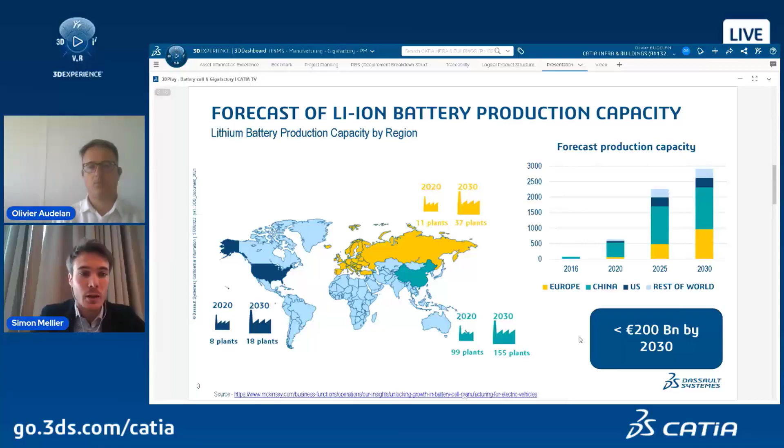And as you may know, the construction of the gigafactory is quite complex, requiring the integration of numerous capital expenditures, such as the buildings, the infrastructure, the energy, and the different production equipment that will be required, as well as the specific areas and specific atmosphere for testing, but as well for production, like dry room, clean room, and others. So can you move to the next slide, please, Olivier?

So how can we support the battery cell manufacturer? Actually, we have created a solution offer based on three main pillars and supported by the 3D Experience platform. The first pillar on the left side of this slide is about battery cell development from material to system. Then you have the battery manufacturing, operation, engineering, and execution in the middle. And on the right, highlighted in yellow here, there is the battery factory infrastructure for engineering and commissioning of the

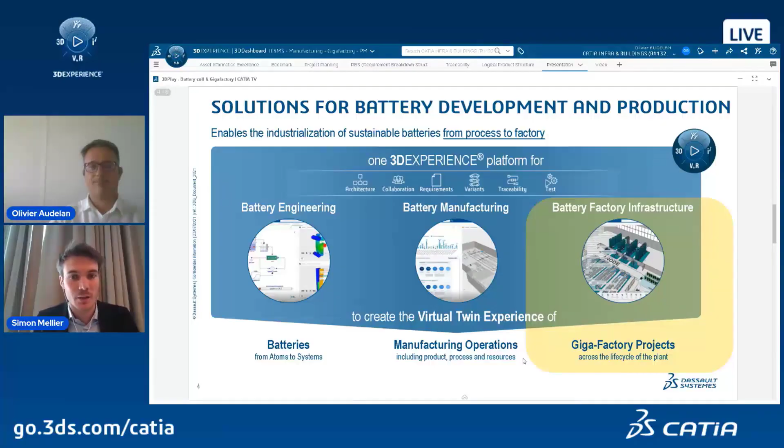factory and gigafactory. So the goal is really to connect the product to the process and the process to the gigafactory and create an end-to-end virtual twin experience to enable the most efficient industrialization and the delivery of the most sustainable battery cells. So today, we propose to focus on the highlighted pillar here in yellow about the battery factory infrastructure. Next slide, please, Olivier.

So, thank you. So considering the market demand and the incomparable factory construction plan, it's very critical to improve the industrialization and the ramp-up time of production facilities, whether the pilot lines, but as well the gigafactory for production at large scale.

This type of project is a collaborative process between the factory operator, the contractor, the line builder, the equipment makers, and it covers several steps from the user requirements, the conceptual engineering, going through the basic, then the detailed engineering and construction, followed by the commissioning, the qualification, and it can take 2, 3, or 4 years until the industrialization of the gigafactory itself.

So usually, what we have seen so far, there is a lack of continuity in the exchange between all the stakeholders that I mentioned before, so between the factory operator and its service suppliers. And this lack of continuity results in a lack of control of the relationship and time lost, especially during the engineering phase, with many sequential steps, errors being discovered too late sometimes, but as well during the qualification and the validation of the production and the production line.

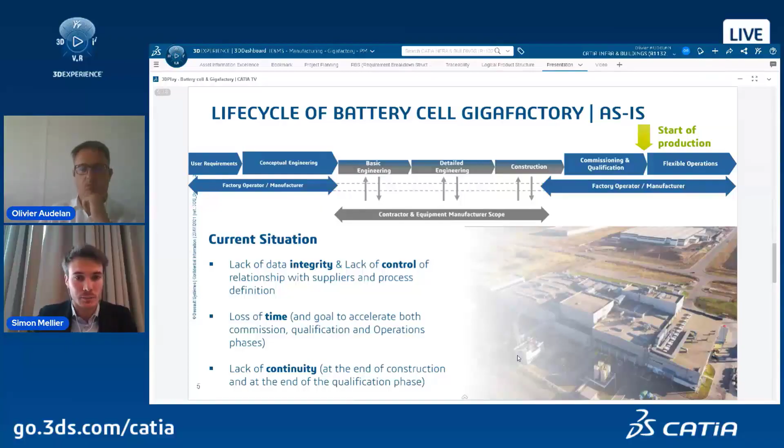Next slide, please, Olivier. So with the 3D Experience platform, we propose to our customers to create the virtual twin of their production facility at the scale needed to meet their challenge. So it can be from the equipment to the line, to the plant, to the manufacturing network. And it allows keeping control of the relationship with the service supplier, doing agile loops to design an optimized manufacturing line. Because you can share data, you can run simulation, you can proceed to the virtual qualification of the line. And all of that will dramatically reduce the time lost and the cost of the industrialization of the line.

But not only, we can use the virtual twin to build and simulate a new line, but it could be used as well during the operation phases. So you can optimize and predict your operation, comparing the real world data from the plant and the data that have been simulated using the virtual twin of the line.

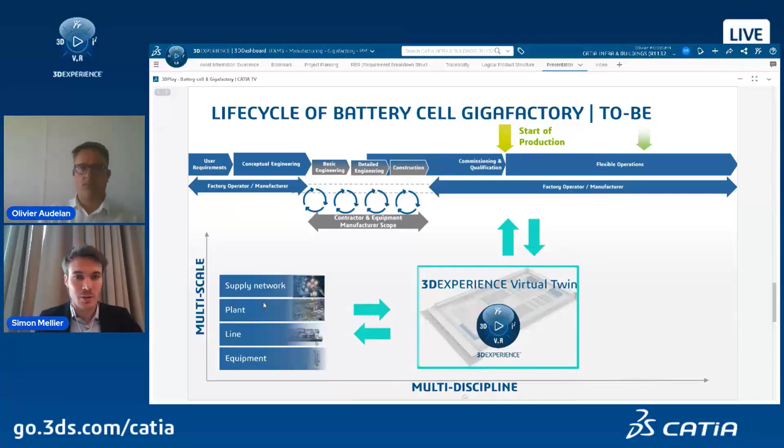So we can connect the people with information and the data, and that will enable quicker, more informed decisions while introducing virtualization and simulation into the manufacturing planning and operations and the industrialization of the line. And all of that will help to ensure the gigafactories are produced as designed in the most cost-effective and high-quality manner. Next slide, please, Olivier. So how can we do that?

So we have created a dedicated solution, the battery factory infrastructure, and it enables the development of all the functional systems in your gigafactory. It will define, simulate, validate the behavior of the complex system and ensure the engineering integrity from the requirements through the system engineering, the model-based design approach, around one collaborative single source of information.

So it allows the synchronization of all engineering processes around one collaborative single source of information to get the right design decisions for your factory, for example by creating the layout of the factory fully compliant with the industry standard and the building information model, the BIM. But enough talk. I will give you the floor, Olivier, to show us in real life what it looks like.

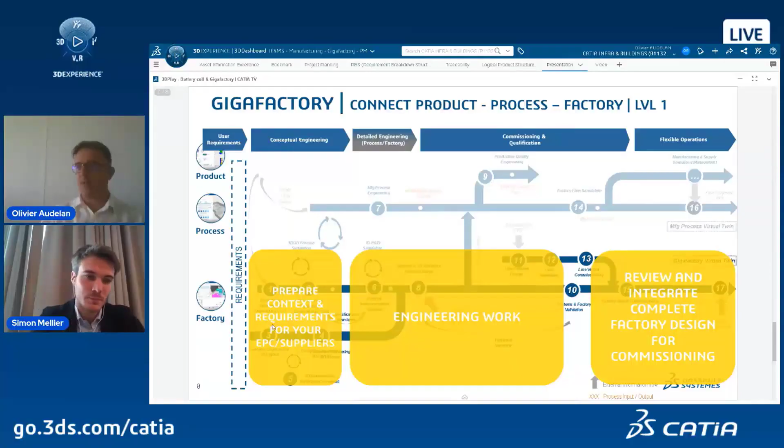Thank you, Simon. Thanks a lot. So thank you for all those inputs. So let's have a look now at how CATIA could help to enhance the way we are defining the gigafactories right now.

What is really important, we are considering, in fact, a Gigafactory as a system of systems, and so this is why we really want to embrace a systems engineering approach. And to do so, we fully rely on our CATIA data model in order to be, first of all, able to manage the requirements, because everything starts with requirements.

And so what is really important is to be able to capture and collect any kind of requirements. Whatever those requirements are, coming from the industry, from the regulations, from standards, norms, in order to drive afterward your design. But not only, the purpose is not only to drive the design, it's really to anticipate potential issues or constraints coming from operations.

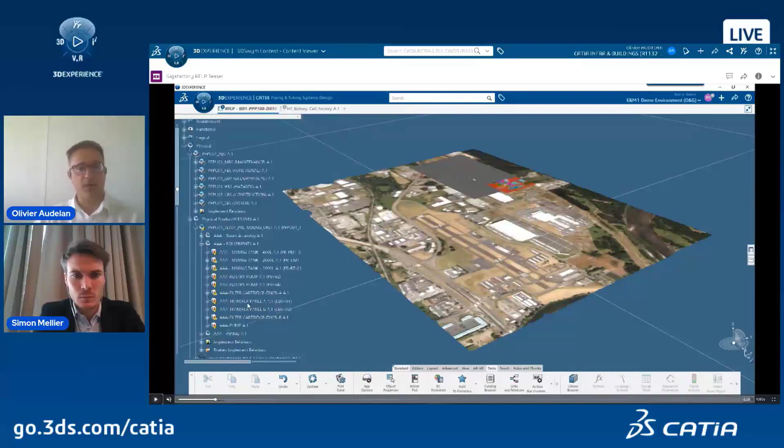the right way, meaning being able to identify the right sustainability impact, the right cost analysis, and the right technology efficiency in order to choose the right solutions and to prepare the right specifications for my supplier afterwards, up to them to manage the detailed design and then the construction of my Gigafactory. But at least as an owner and operator, I will have this capability to have this defined.

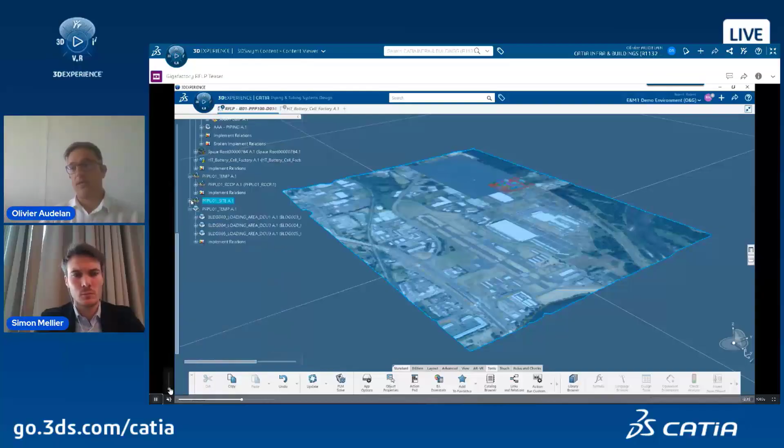And the purpose for us is really, as you can see, to integrate the Gigafactory in its environment. Because as the Gigafactory is a system of systems, we need to be able to interact with the external environment, whether those are natural resources, existing infrastructures, linear infrastructure, civil infrastructure, but as well industrial infrastructures. If you potentially need to bring hydrogen into the Gigafactory. So to really understand all those potential impacts and to take once again the right decisions. So this is why you will have different capabilities, different layers in your Gigafactory.

A volumic decomposition, as you can see, with all those volumes in order to manage all that is related to spaces, to your functional architecture. So this is really based on your requirements, your capability, especially for an owner and operator, to define all your functions, mission, services for your Gigafactories, okay? And based on that, you will have capabilities to decompose the layout of your Gigafactory by volumes, unit, subunit, until the rooms and potentially until the main equipment's positioning.

But it's not only, as I told you, and as you can see on that part, to take into account engineering topics. You can see that we have construction, we have as well hazards. So all of that information can be taken into account as soon as possible, because it's really key to identify the capability for your mobile equipment to navigate from a building to another one, from a unit to another, in order for them to bring the right resources to the equipment, or to move an equipment from a unit to another one.

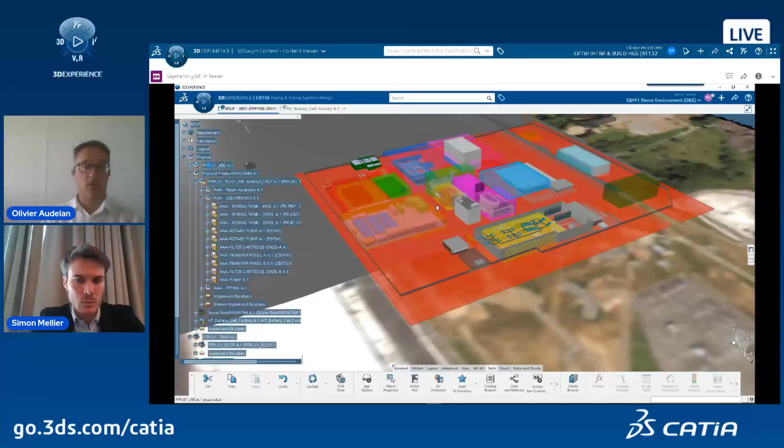And those inputs have to be taken into account as early as possible, because if you think about that during the construction phase, it will be too late. And so potential impacts of modification will be huge. So this is why having this definition of your Gigafactory as soon as possible is definitely key for an owner operator to anticipate as much as possible those potential impacts.

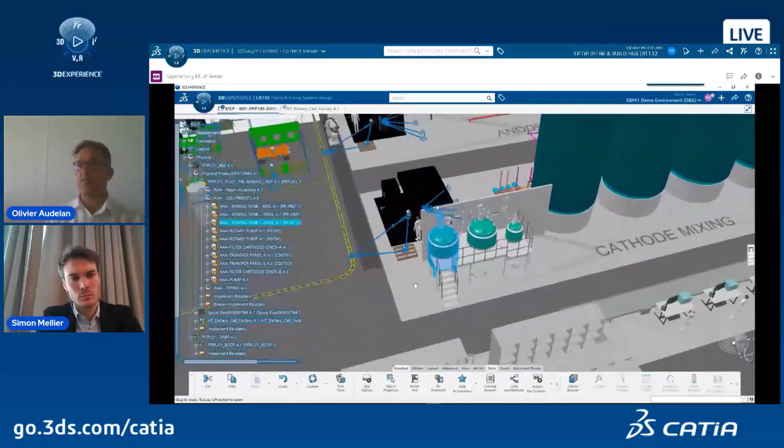Then we will have the capability to go to the detailed design of the factory, of the process lines themselves. So being able, based on the process flow diagram, based on all your systems definition, to manage the detailed design of your different process lines, and to manage as well the definition of the equipment themselves. Again, what is key is everything is based on the requirements.

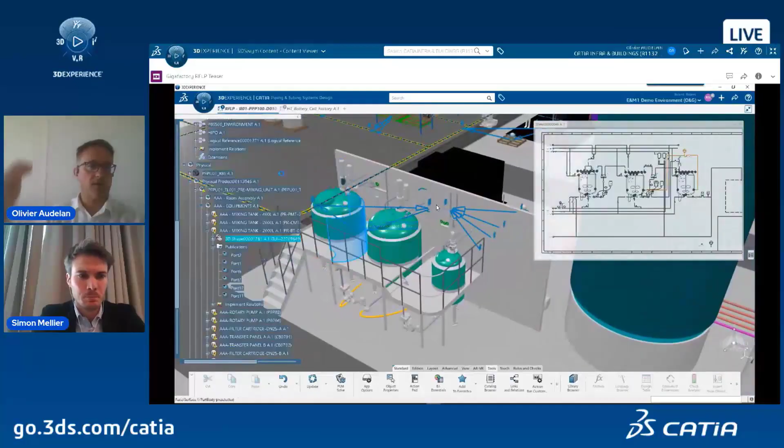So it's really a requirements-driven approach. And like this, you ensure an entire traceability all along the life cycle of the Gigafactory. Whatever the layer you are dealing with, on the site, on the factory, on the equipment, no problem. This is really an entire traceability.

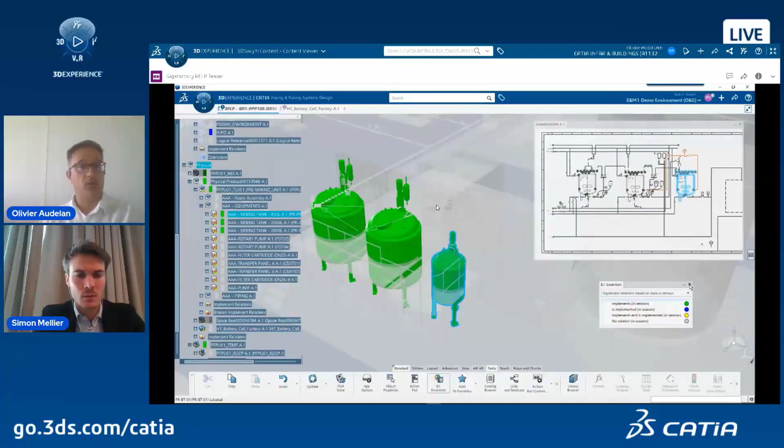And what is key is that your systems will be fully defined from 1D to 2D until their 3D definition, and then up to them to be consumed afterwards by our DELMIA solutions, in order for them to manage the process planning, to manage all the training for the operators, and so on and so forth, to optimize as well the factory flow by itself.

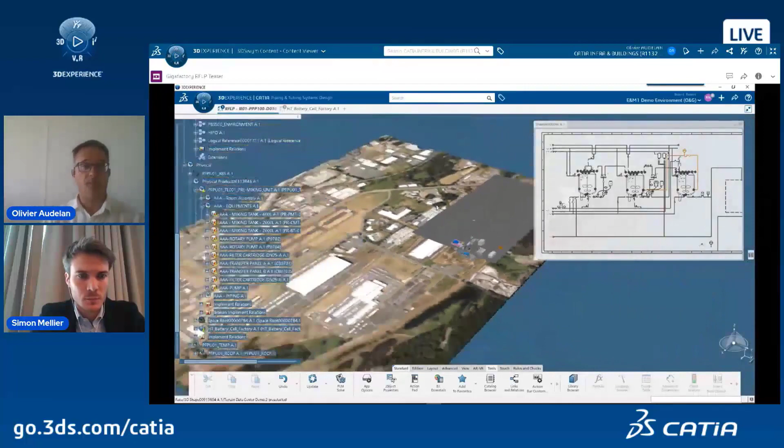So this is really, as explained by Simon, capability afterwards based on a single source of truth, to have all stakeholders working all together on the same data, on the same define and design of a gigafactory, in order for them to be as efficient as possible during operation phase.

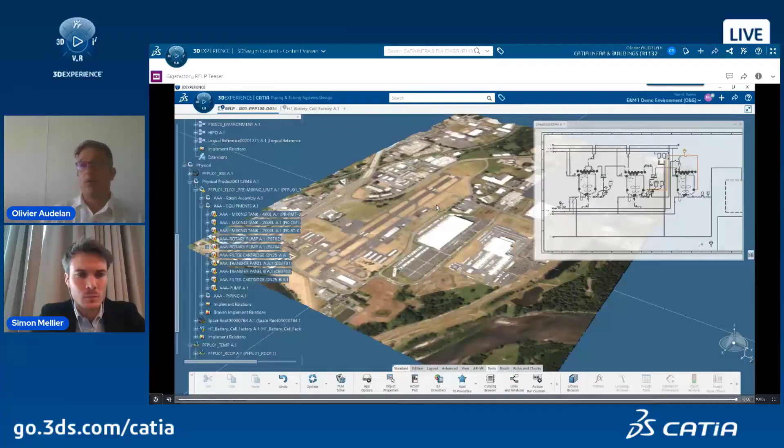So this first part was really to present you how CATIA can help based on the RFLP data model, so requirement, functional, logical, physical data model, to define and potentially to design, if you're an EPC, a gigafactory. But let's assume that now I'm not anymore an engineer.

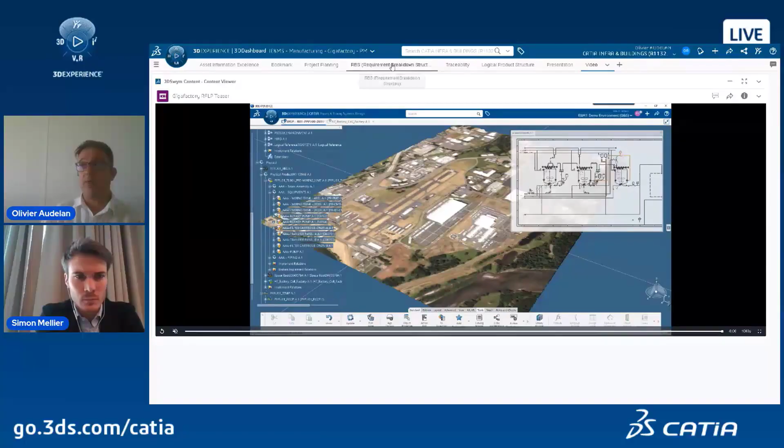Let's say I'm more project manager oriented, and so my purpose is to be sure that at any stage of my gigafactory life cycle, I will have access to the right information. And this is where the platform is really important by providing a single source of truth, a real collaborative way of working. Because as you can see now, I'm on the dashboard, and I will be able to have access to any kind of information.

Once again, the purpose is for you to be able to have access to the right information at any time and to be able to analyze, to manage the traceability, to manage the impact of change. And we will see just after why we think the platform is definitely fulfilling all those inputs. But now let's have a look at my dashboard. As you can see, on a single view, I will have access to any kind of information.

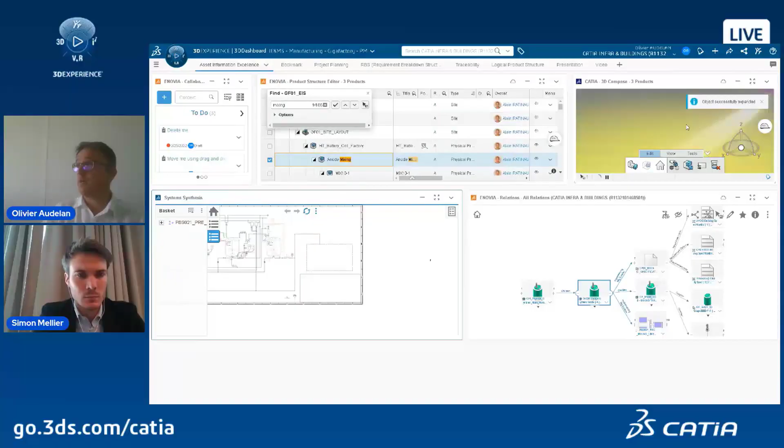And what is really interesting is if I want to visualize them in 3D, I just have to do a focus on, and then you can see that I have directly the data loaded in session. So for sure, I have a huge amount of data in that case, but you can see that directly I can zoom in on my data. But let's hide some data in order to have a better view. I will just show you that directly on the 3D play.

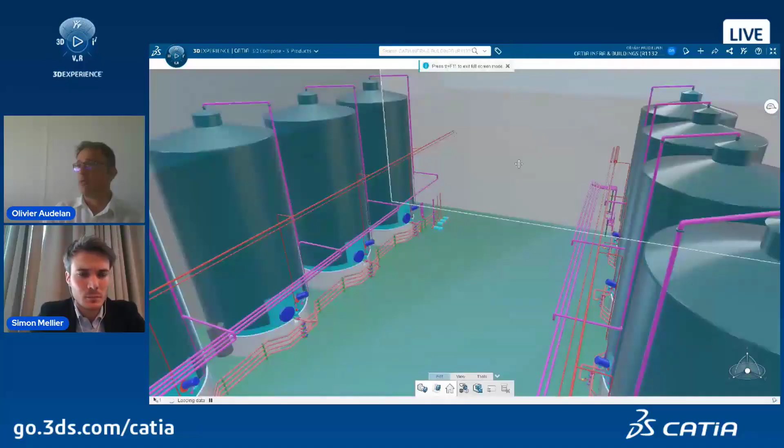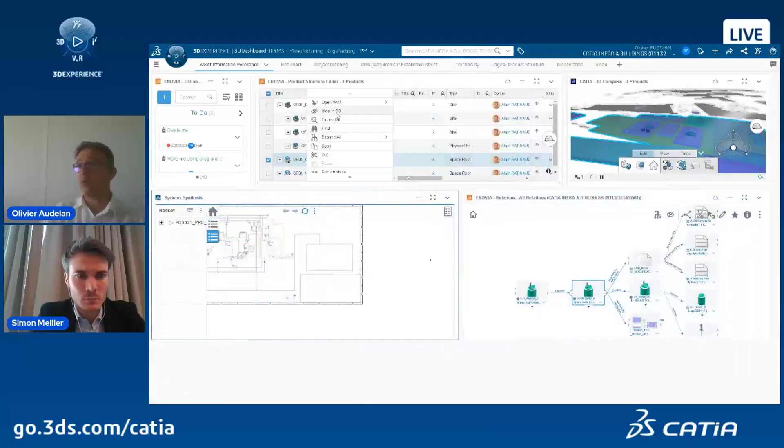So if I just zoom out, I can have access to the same information as I was showing previously on my CATIA environment, on my authoring environment. You see, definitely having the capability to visualize all those information, and for sure to search for information, but as well, if I want to hide some information, I have this capability, and then directly I can see my gigafactory as it has been designed, and this is where I will find all my process lines and all my equipment directly on my gigafactory.

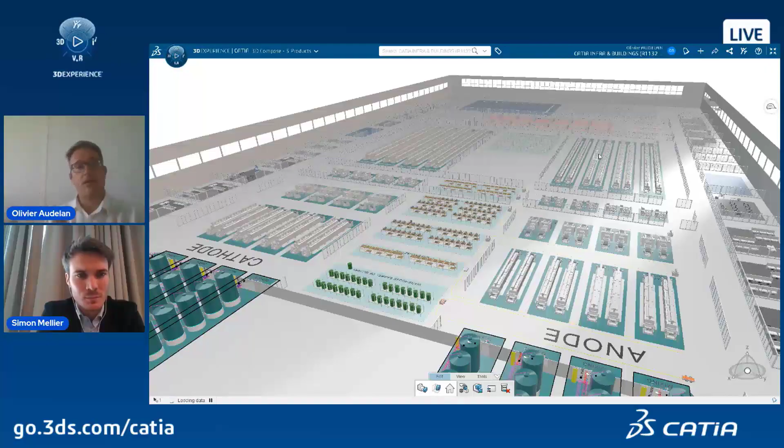So really capability for you to manage a huge amount of data, because this gigafactory has been integrated in its environment. In this case it's a cluster in the south of France, representing an area of about 100 kilometers by 30 kilometers. So a huge amount of data that you can aggregate on a single environment, and as you can see, you can navigate inside. But what is important as well, if you remember, I was searching for my mixing tank.

What is important is that by searching on my product breakdown structure, I will have access to all the information related to that mixing tank, meaning I have a 360 view of my mixing tank: all requirements, all functions it's belonging to, on which schema its behavior is defined, on which area it has been used, and which documents it relies on in terms of standards, specifications, regulations, etc.

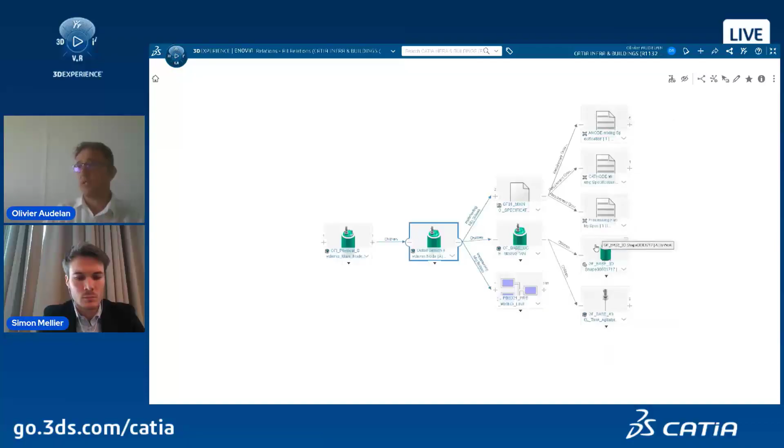So you see, I have my mixing tank. I can see that that mixing tank is used on that piping and instrumentation diagram. You can see that this mixing tank is fulfilling those requirements and has this 3D representation. So capability for you to have access to any kind of information.

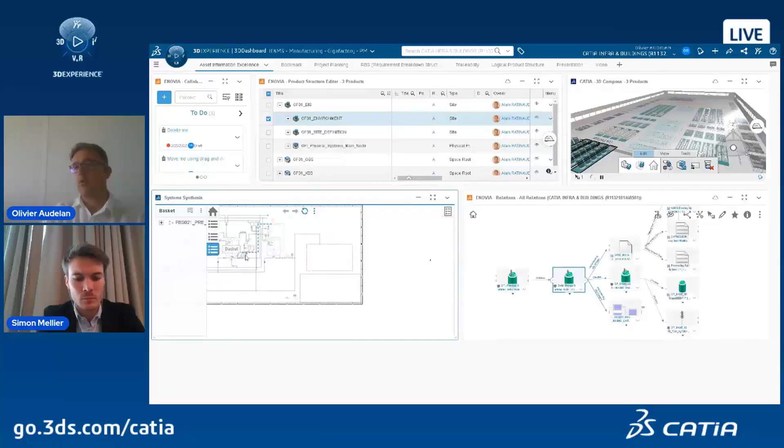But what is really important is not only to have access and to be able to visualize the information, because if you want to visualize the information, it's just a matter of drag and dropping this to this new tab. And like this, you can visualize your schema, you can visualize your requirements. So in that case, I already loaded the data.

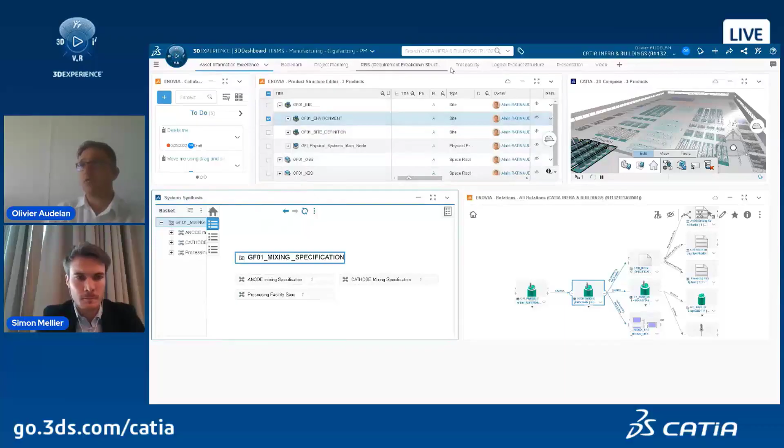So you see that I have a P&ID that has already been loaded. I could visualize requirements as well, and any kind of information needed for me to analyze the data I'm working on, and specifications, for example. But what is also important is to be able to manage the traceability.

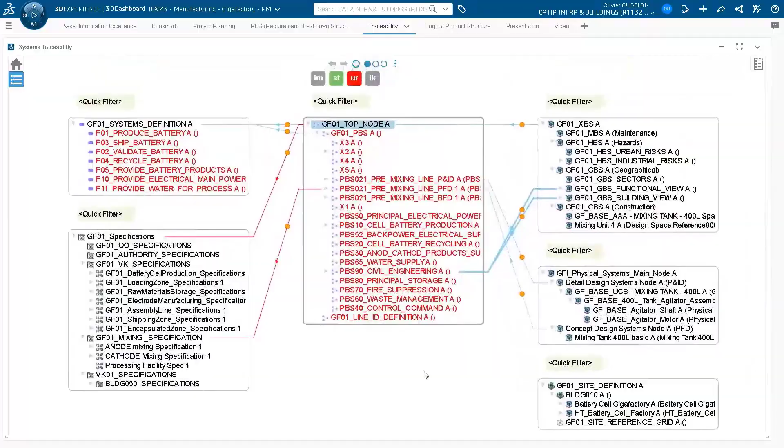So yes, as I told you, traceability is key. The purpose is to be able to identify any impact related to a change. As you can see on this widget, we have the different views of our asset, of our Gigafactory, meaning its functional architecture, all the requirements related to this Gigafactory, but as well all the schematics, so all the systems decomposition, the geographical decomposition, plus the product breakdown structure, meaning the detailed design of the Gigafactory.

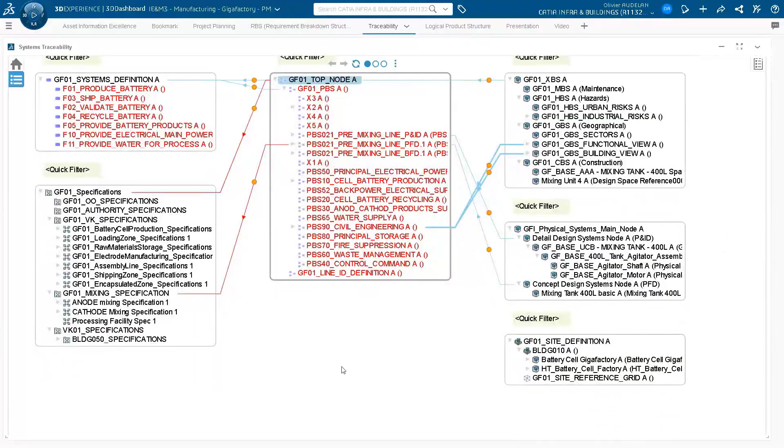So what is really key is that if you have to change a requirement, due to a supplier or due to an internal department asking you to perform this modification, quickly, by just clicking on that mixing specification, you can see all the impacts related to that modification.

So it means that for any kind of information, you could quickly have a holistic view of all the potential impacts in order for you then to involve the right actors to analyze or deep dive on the analysis of the change, and then to be able to take the decision.

Another topic, because we talk a lot about sustainability: what is really important is how to manage the sustainability aspect on the definition, not only on the design, but directly when we are doing the definition of our Gigafactory. When are we able to manage such environmental feasibility?

This is something that we can manage as early as possible, meaning that when you are defining your Gigafactory, you will think about technical feasibility, economic feasibility, but now we will focus on environmental feasibility.

We have definitely the capability to enrich the Gigafactory virtual twin by aggregating, by adding information related to sustainability. And this is really important, because like this, for you to take decisions, you will have access to all the information: economical, environmental, and technological. Really important for you to manage different trade-offs and to take the right decisions.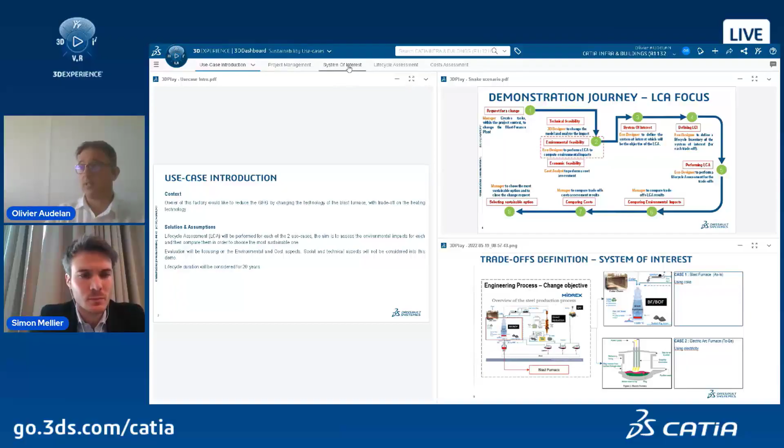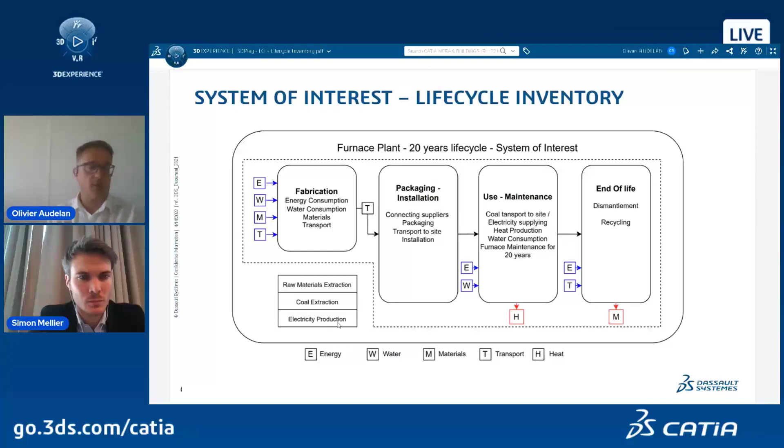So to do so, we define our system of interest, meaning being able to define for each phase of the factory—fabrication, packaging, use, maintenance, and end of life—what are the key topics, what are our interests on each topic, and what are the inputs and outputs for each step. You can see that for a Gigafactory, typically the raw materials extraction, the coal extraction, and the electricity production are not the responsibility of the owner and operator, so those topics won't be taken into account during our analysis.

As soon as we have this system of interest, and again we are managing all of that thanks to requirements—keep in mind, traceability, all along the life cycle of your Gigafactory—we will have the capability to analyze directly.

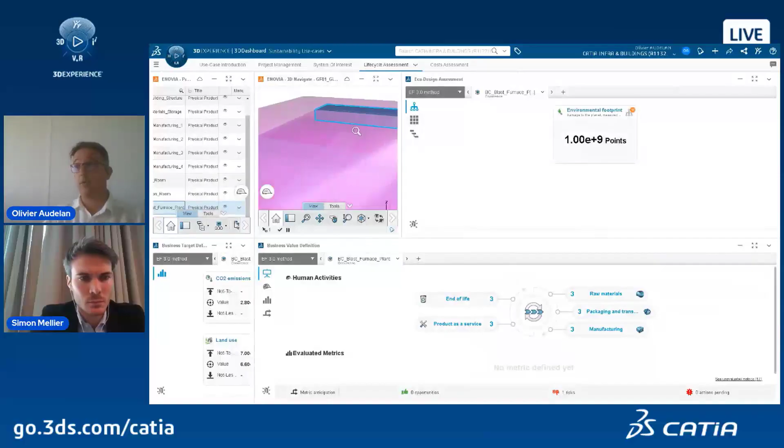And even if you have a look, I don't have the detailed design of my Gigafactory yet, I just have a basic representation of my Gigafactory. But in fact, based on our capability to define what our main system of interest is and what main KPIs we would like to track—in that case, CO2 emissions, land use, and water use.

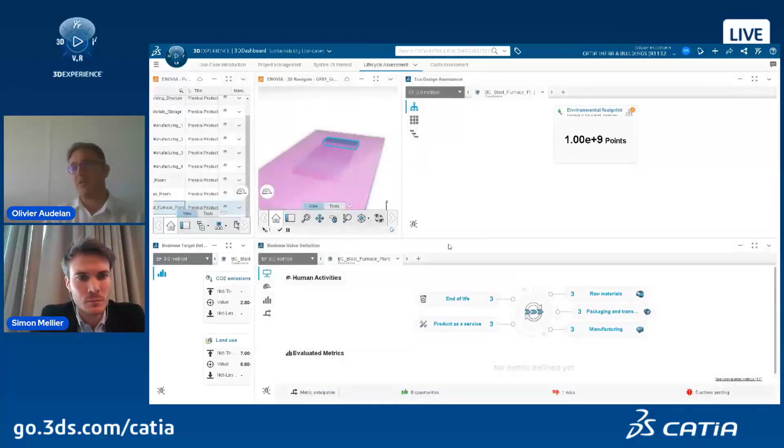We did it on a simple way, just for a demonstration. We will have the capability, thanks to our connection with the EcoInvent database, to collect all these KPIs and to manage this life cycle of interest, and then to define our life cycle assessment.

Based on the definition of our factory, and based on the limits we define for each KPI or the target we would like to achieve, you can see the result at the end. In terms of CO2 emissions, we are within boundaries, but we are out of boundaries for land use and for water use.

So this gives you, really early on in the process, the capability to think not only about cost and technological efficiency, but as well environmental impact, and to take the right decision to define the right systems for your suppliers, up to them to define them in the right way.

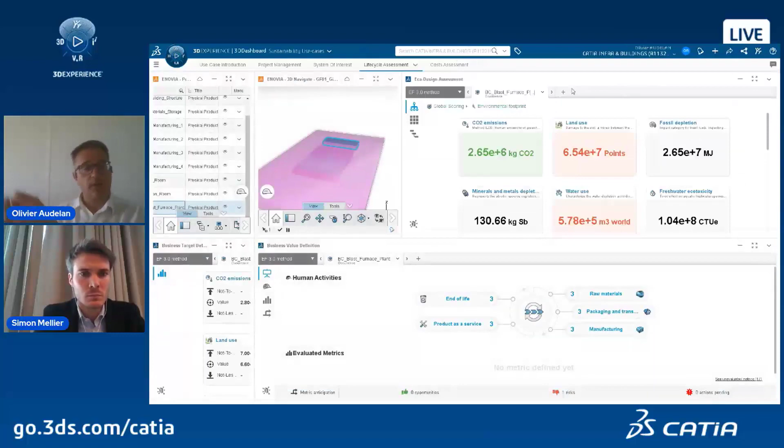So just for you to know, this was a quick introduction to the sustainability topic. We will deep dive into it in September for a new CATIA TV episode led by Yarob Odi. Stay tuned in September for that topic.

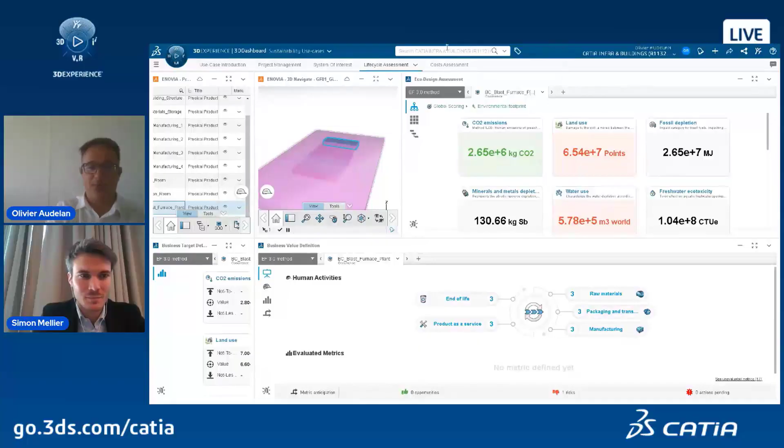But let's go back. I hope now I'll be able to show you the traceability. No, I have definitely an issue on that topic. I'm sorry, I won't be able to present it to you, unfortunately.

But let's go to the conclusion. I will give back the lead to Simon for the conclusion. Once again, sorry for that last minute issue. Let's go to the conclusion right now.

Thank you, Olivier, for this clear explanation and very interesting demo. As you understood, simulating the link, as well as the associativity between the requirements and the design at all stages of the design process, enables us to detect incorrect, missing, or conflicting requirements and to perfectly engineer the factory process.

In addition, the solution you have seen here allows you to work with a comprehensive, modular, and sustainable approach, as Olivier has shown, which gives the opportunity to collaborate with partners and the entire ecosystem to ensure the design quality of the Gigafactory layout by performing design integrated checks between the 2D schematic and the associated 3D design and all the related information.

So in the early phase, you will be able to assess, for example, what the environmental footprint will be, as well as to collaborate with the line builder, the EPC, the machine maker, to be sure that everyone is working on the same repository, the same data set, and the same level of information.